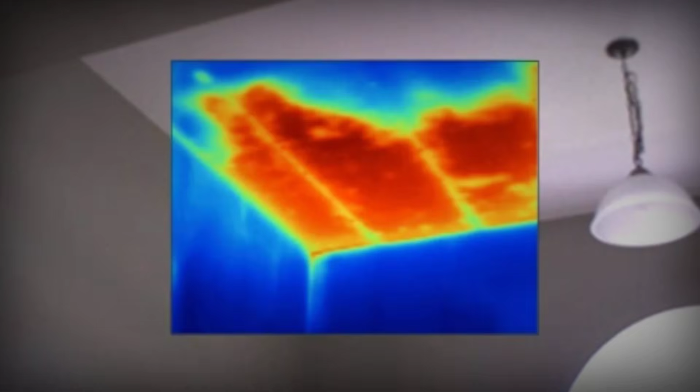There is a house in Denmark that hasn't used a furnace in 30 years. Not because it's connected to a special grid, not because it runs on solar panels covering every inch of the roof, not because its owners have found some modern technological workaround, because the house itself stores heat in its walls, in its floor, in the ground beneath it. Heat collected in summer, held through autumn, released slowly, quietly, through the depths of winter.

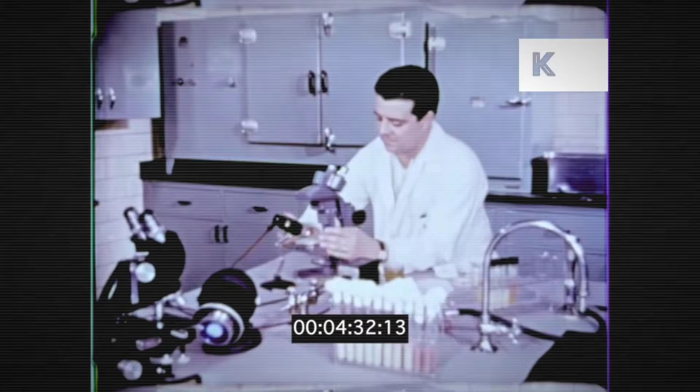No boiler, no gas line, no service contract, no monthly bill arriving in January when the temperature outside drops below zero, and every other house on the street is burning through fuel it cannot afford. Just a building that remembered warmth and gave it back when it was needed. This is not a new idea. It is not an experimental concept being tested in a university laboratory somewhere.

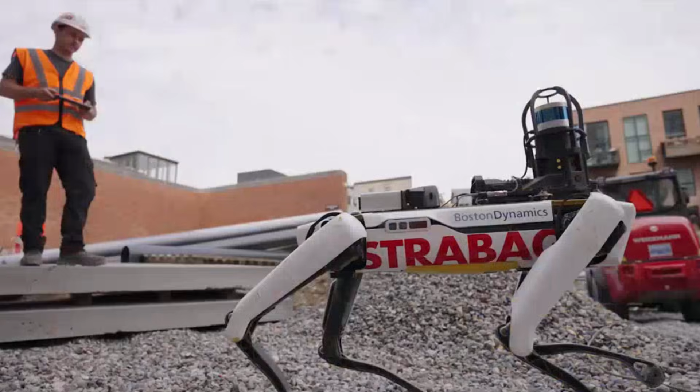It is a principle that builders understood centuries ago, that physicists measured and confirmed in the 20th century, that entire northern communities built their survival around for generations. And it is a principle that the modern construction industry, the energy industry, and the building code system in most of the Western world has made almost impossible to build legally today.

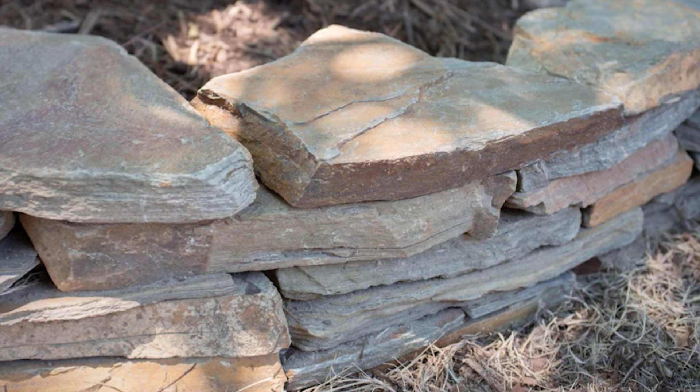Not because it doesn't work, because it works without generating revenue. You cannot sell a monthly heating bill to a house that stores its own heat. You cannot service a system with no moving parts. You cannot build a maintenance contract around stone and earth and water, and that is the only reason this technology feels unfamiliar. This is that story.

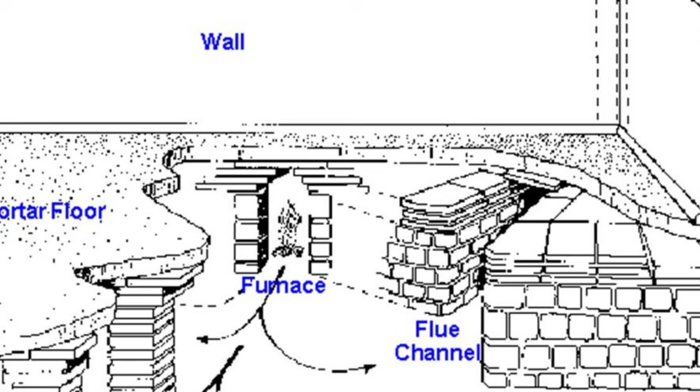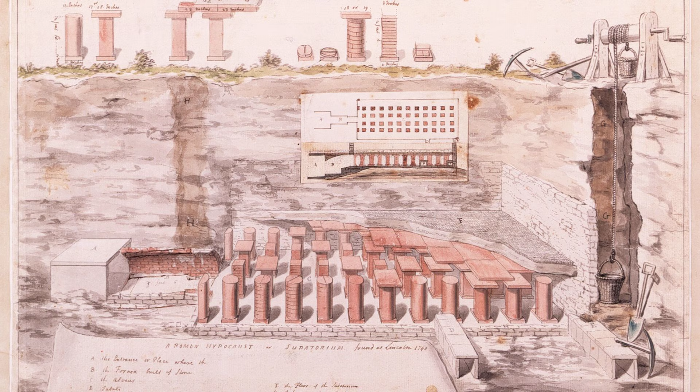Go back 2,000 years. The Roman hypocaust system is usually described in history books as underfloor heating, a clever, ancient luxury, something emperors used to keep their bathhouses warm. That description is technically accurate. It is also profoundly incomplete. The hypocaust was not just a heating method, it was a thermal storage system.

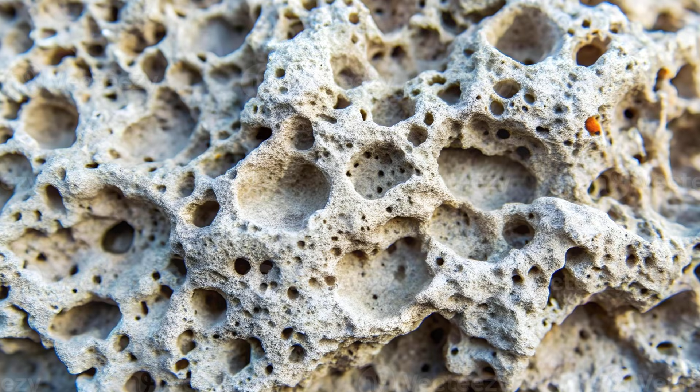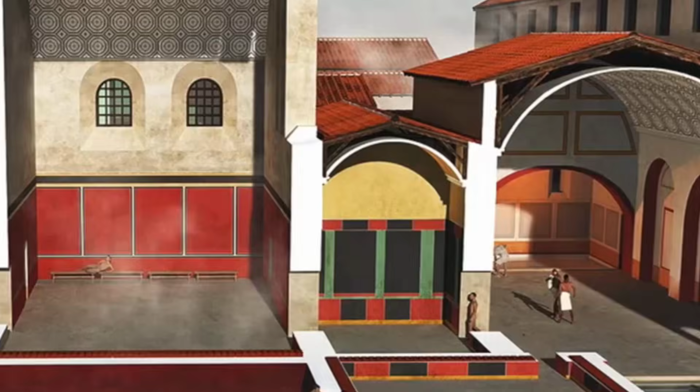Hot air generated by a furnace moved through channels beneath a raised stone floor. That floor, sometimes 6 inches of solid tile and concrete, absorbed the heat. It held it and released it slowly upward into the living space long after the fire itself had died down. The Romans weren't just heating a room, they were charging a battery made of stone, capable of holding thermal energy for hours, sometimes for an entire day.

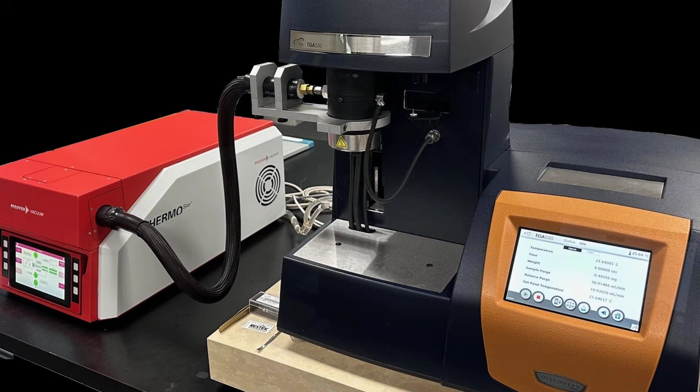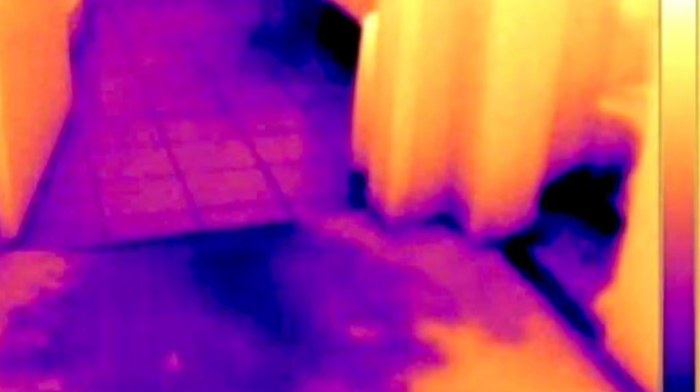The principle they were exploiting is called thermal mass, and it is one of the most powerful passive building technologies ever discovered. Every material has a capacity to store heat. Some materials store very little. Air, for instance, holds almost no heat at all. Warm a room full of air, and the moment that heat source stops, the air cools within minutes. Stone is different, concrete is different, water is different. These materials absorb heat slowly and release it slowly.

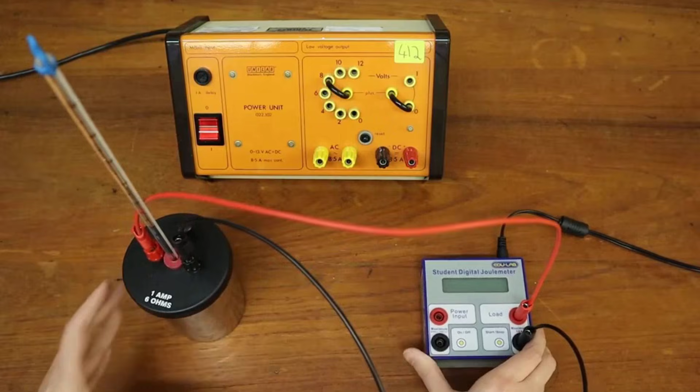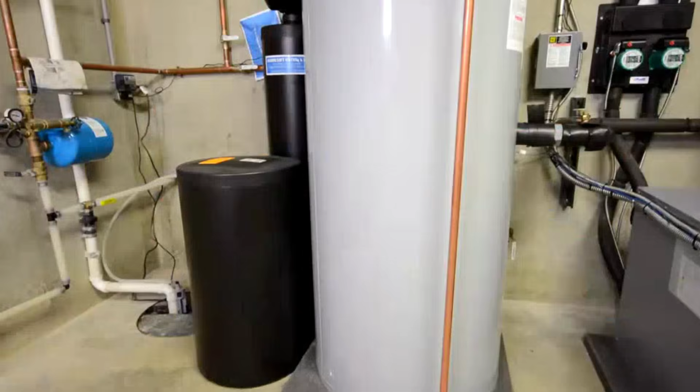The technical term is specific heat capacity. It is the measurement of how much energy a material can hold per unit of mass. Water has one of the highest specific heat capacities of any common substance. It takes enormous energy to raise the temperature of water by a single degree, and once raised, it releases that energy over an extended period. This is not a subtle effect. A single cubic meter of water can store enough thermal energy to heat a small room for an entire day.

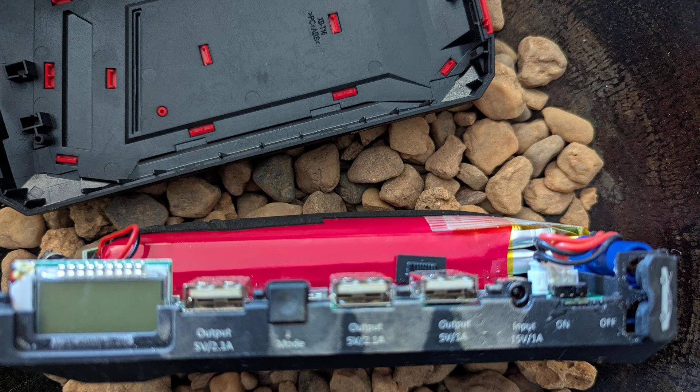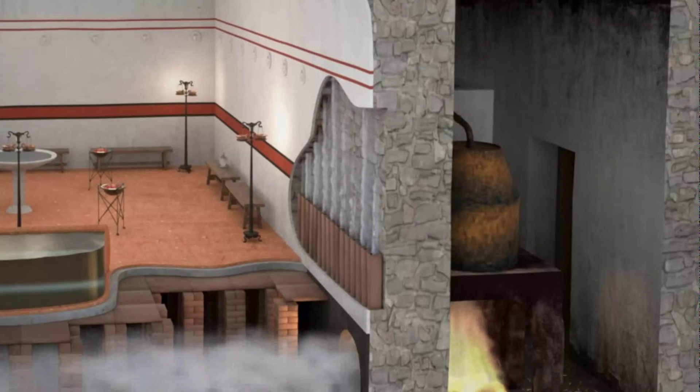A house designed around this principle, with water, stone, or earth as its thermal core, doesn't just stay warm. It becomes a heat reservoir, charging during periods of warmth and discharging slowly during periods of cold. A battery that runs on temperature difference instead of chemical reaction, and it requires no electricity to operate, no moving parts to service, no fuel to purchase. The Romans understood this intuitively. They built it into their floors, their walls, their public buildings.

But the Romans were not the first. Go further back. Neolithic builders constructing passage tombs in Ireland oriented their structures to capture solar gain at specific times of year. The famous passage at Newgrange aligns precisely with the winter solstice sunrise, flooding the interior with light and heat on the shortest day of the year.

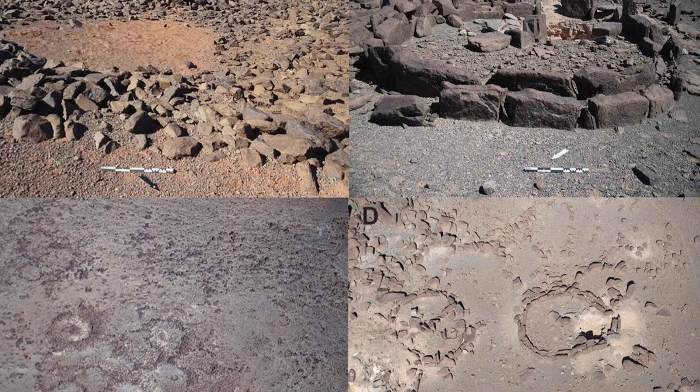Archaeologists once interpreted this as purely ceremonial. More recent thermal analysis suggests something more practical. The thick stone passage absorbed solar energy during the brief winter sunlight hours. The interior stayed measurably warmer than the external temperature, not because of fire, because of mass and orientation. 5,000 years ago, before written language, before bronze, before the wheel was in common use, builders understood that stone holds heat, and they built accordingly.

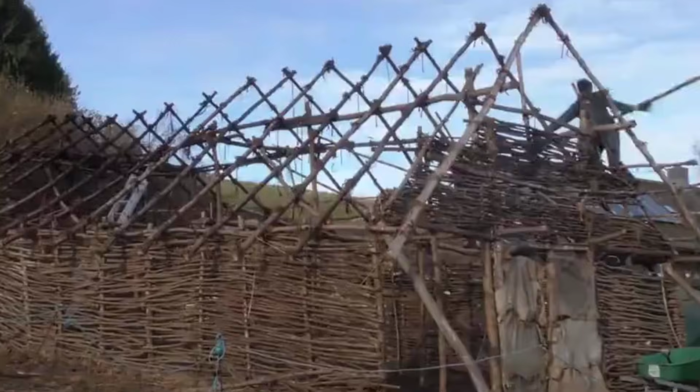Move forward to medieval Scandinavia. Viking longhouses were not primitive shelters. They were sophisticated thermal systems. Thick turf walls, sometimes 3 feet of compressed earth and grass. Earth is an extraordinary insulator. It changes temperature slowly, extremely slowly. The ground at a depth of just 6 feet maintains a nearly constant temperature year-round.

In most northern climates, that temperature sits between 8 and 12 degrees Celsius, cool in summer, warm relative to outside air in winter. Viking builders placed their structures partially into hillsides. The earth surrounding the lower walls acted as a thermal buffer. It did not just insulate, it actively moderated the interior temperature, pulling excess heat out in summer, releasing stored ground warmth in winter.

The longhouse didn't fight the climate, it connected to it, and through that connection, it stayed habitable in conditions that would have been lethal in a modern, thin-walled structure without active heating.

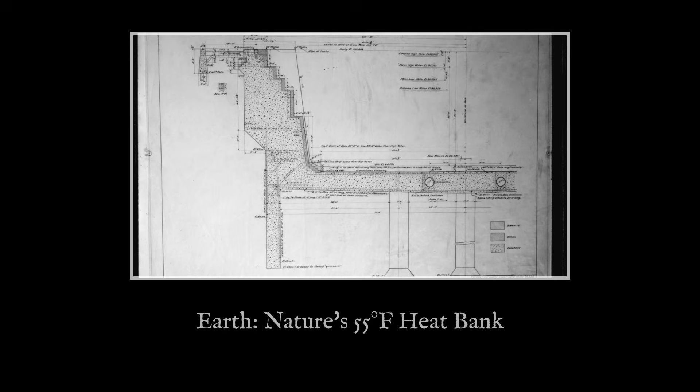Now move to the 20th century. The physics did not change, but someone finally started measuring it precisely. In the 1940s and the 1950s, researchers began documenting what they called earth-coupled heat exchange. The principle was that the stable temperature of the ground could be used as an earth reservoir, either absorbing excess heat from a building in summer or providing warmth to a building in winter.

The implications were significant. A building properly connected to the thermal mass of the earth beneath it does not need to generate heat from scratch every winter morning. It draws on a reservoir that has been accumulating energy all year.

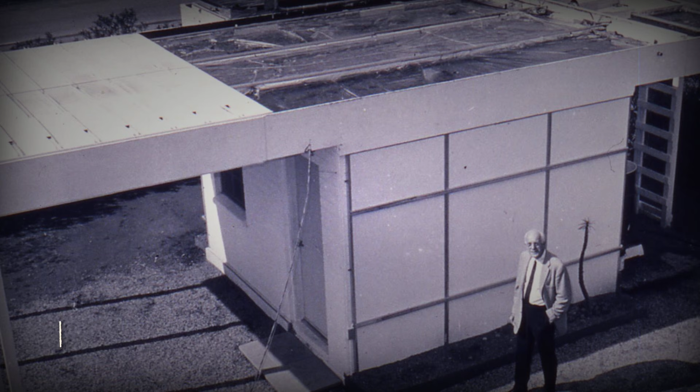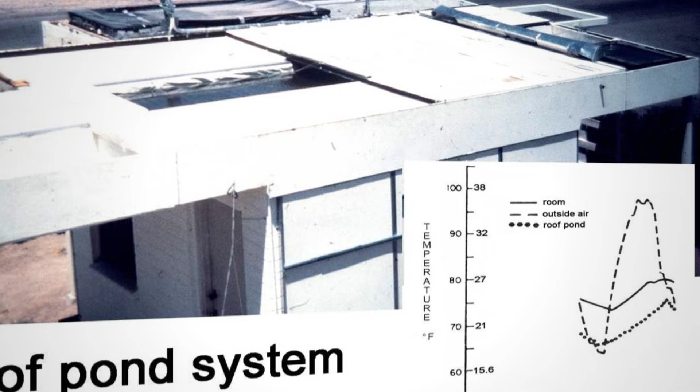In 1977, Harold Hay, an American engineer who had spent decades studying passive thermal systems, completed what became known as the Skytherm house in Atascadero, California. The design was radical in its simplicity. The roof held large bags of water.

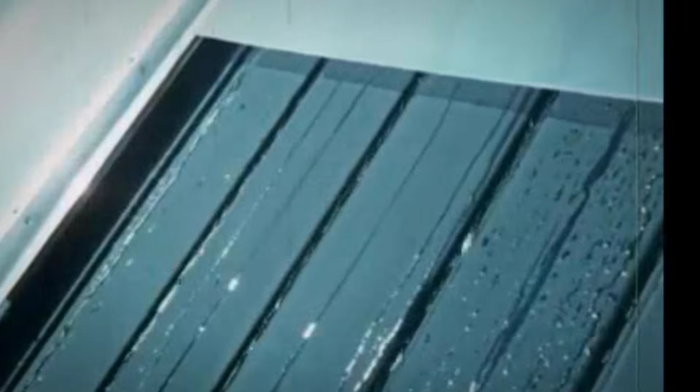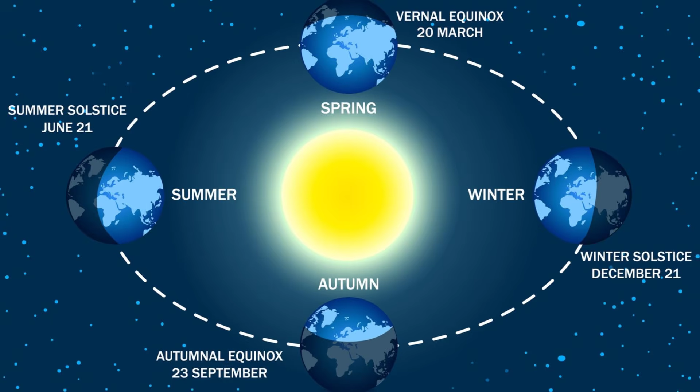In winter, the bags were exposed to sunlight during the day, absorbing solar energy and warming to temperatures well above room temperature. At night, insulating panels covered the bags, and the stored heat radiated downward through the ceiling into the living space below. In summer, the process reversed.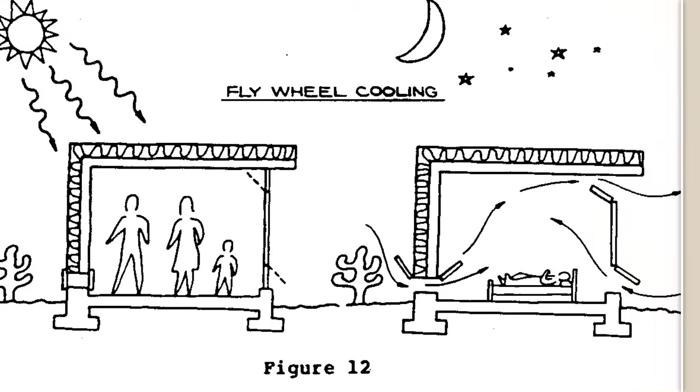During the day, the bags were covered to block solar gain. At night, the panels opened, and the water radiated its heat to the cool night sky, cooling below room temperature. During the day, that cool mass absorbed heat from the interior. No compressor, no refrigerant, no furnace.

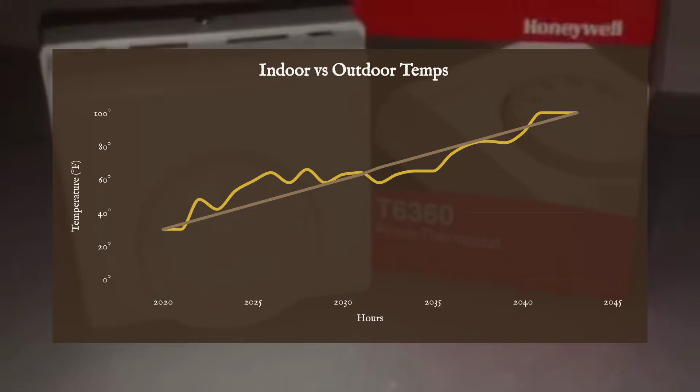Monitoring showed the interior temperature remained between 65 and 75 degrees Fahrenheit throughout the year, in a California climate that saw summer highs above 100 degrees and winter nights near freezing.

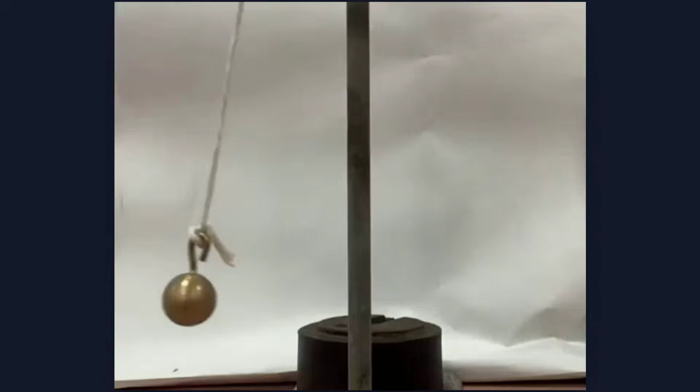One researcher who visited the house described standing inside on a January morning with the exterior temperature near freezing, the interior warm and steady, and no heating system operating at all. Just water on a roof. Physics doing the rest.

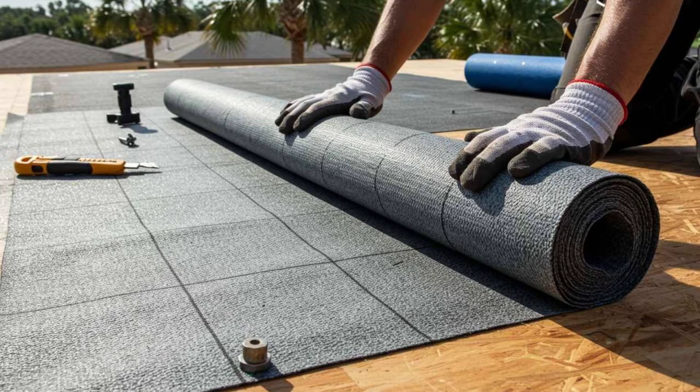The results were published. The technique was documented. A handful of builders in California and New Mexico began experimenting with variations. And then, almost nothing happened. Not because the system failed, because the system had no industry behind it. No manufacturer producing roof pond components. No installer network to deploy them.

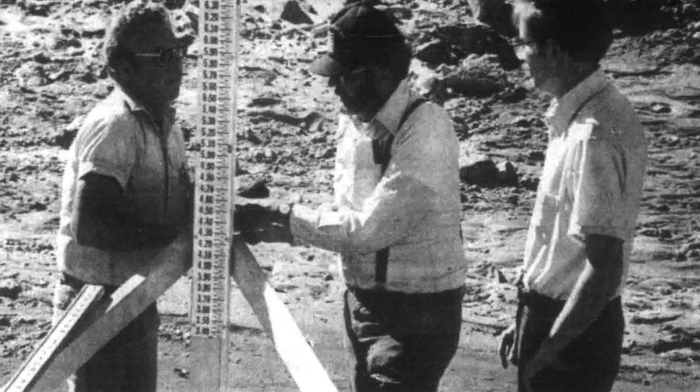No trade association lobbying for code recognition. No certification pathway that allowed appraisers to assign value to a water-filled roof in a standard mortgage assessment. The insurance industry looked at bags of water on a roof and saw liability.

The appraisal system looked at a house with no furnace and saw an anomaly it had no framework to value. The building code system looked at an integrated water-filled roof and saw a category it did not recognize.

Harold Hay spent the rest of his career trying to get this technique into mainstream construction. He never succeeded, not because anyone proved it did not work, but because the pathway from proven physics to permitted construction runs directly through institutions that were built around a different model.

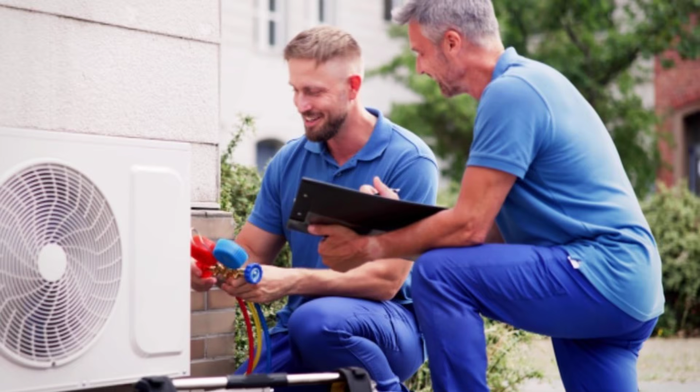A model where heat is something you purchase, where comfort is something you subscribe to, where the system that keeps you warm in January generates a bill, and that bill generates revenue, and that revenue funds the lobbying that writes the codes that determine what can be built. A house that stores its own heat from summer and releases it in winter generates none of that. It is, from the perspective of the energy economy, a threat, not to physics, but to profit.

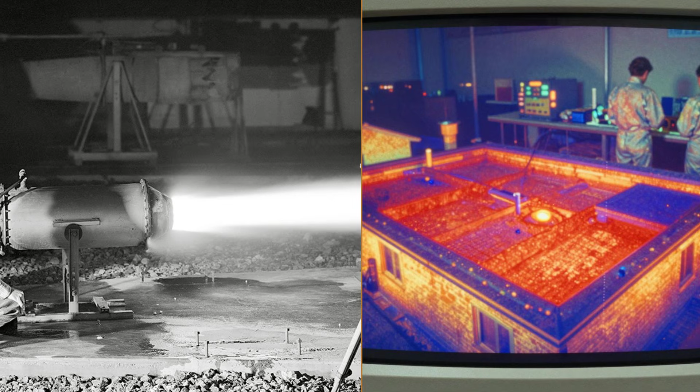Now understand what that actually means for the house you live in today. Your heating system operates on a simple and brutally inefficient principle. It takes cold air, burns fuel to heat it, and pushes it into your rooms. The rooms lose that heat to the outside within hours. The system fires again, burns more fuel, pushes more heat, and the house loses it again.

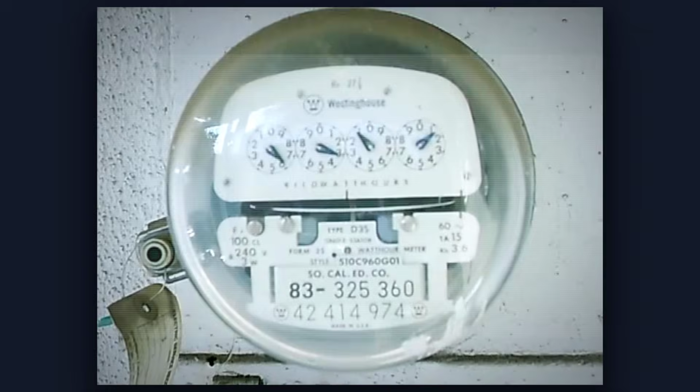It is a continuous fight against heat loss. You are not heating a building. You are constantly replacing heat that a poorly designed building cannot hold. The thermal battery house does something fundamentally different. It accumulates heat over time, days, weeks, sometimes an entire season.

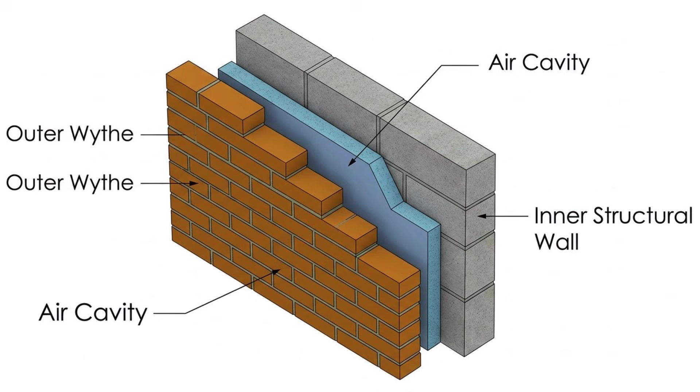In mass walls, in water storage, in the earth beneath the foundation, and it releases that heat gradually at the rate the building needs it. Not in a blast that the walls immediately shed to the outside, but in a slow, steady drift that the mass controls. The difference in energy consumption between these two approaches is not marginal.

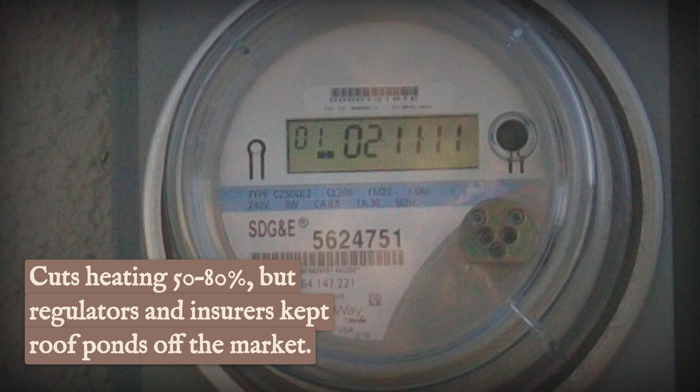Studies of earth-sheltered and high thermal mass homes consistently document heating energy reductions of 50 to 80% compared to conventional construction of equivalent size. Not 10%, not 15%, 50 to 80%. From a technology with no moving parts, no fuel requirement, no service schedule, and no monthly bill.

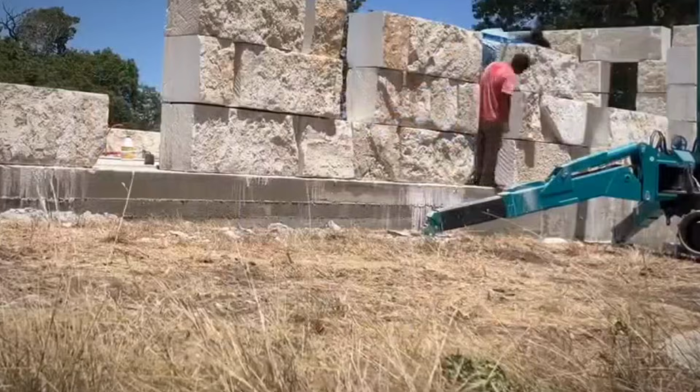In Part 2, we go further. We look at the specific buildings that proved this worked, and what happened to the builders who tried to bring it into the mainstream. We look at where thermal battery construction is still happening today, and why it is happening almost entirely outside the United States. And we look at the question that sits underneath all of this.

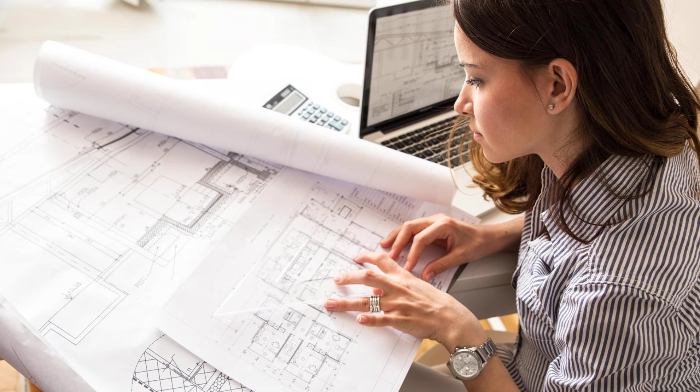If a house can store heat for days, why does your heating bill arrive every single month? The house in Taylor, South Carolina, cost $5,500 to build. No contractor, no permit complications, no elaborate mechanical system requiring annual servicing. Just a south-facing structure with 2,455 gallons of water stored in dark, painted barrels lined along the north wall.

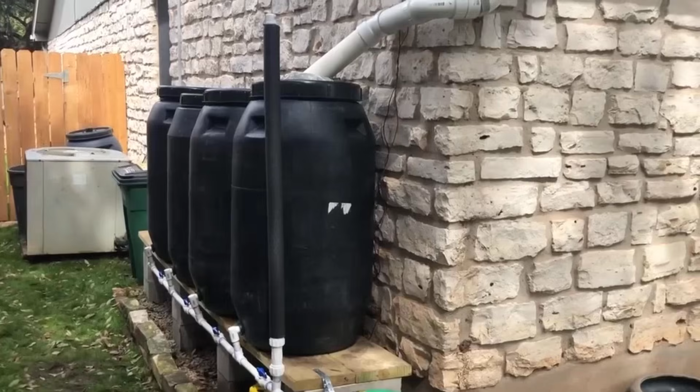Those barrels absorb solar heat through the day. By late afternoon in winter, they are warm to the touch. By morning, they have released that warmth slowly into the space around them. No furnace fired, no propane truck arrived, no bill accumulated. A comparable heated structure would cost approximately $1,000 in fuel every single winter.

The barrels didn't consult a building code before storing heat. The sun didn't wait for regulatory approval before warming the water. It just worked. Exactly the way it worked beneath a Roman hypocaust floor. Exactly the way it worked inside a Viking longhouse buried into a hillside. Exactly the way Harold Hay measured it on a water-filled roof in Atascadero, California in 1977. Physics has never changed. Only the permission has. Now look at what the rest of the world did with that same physics.

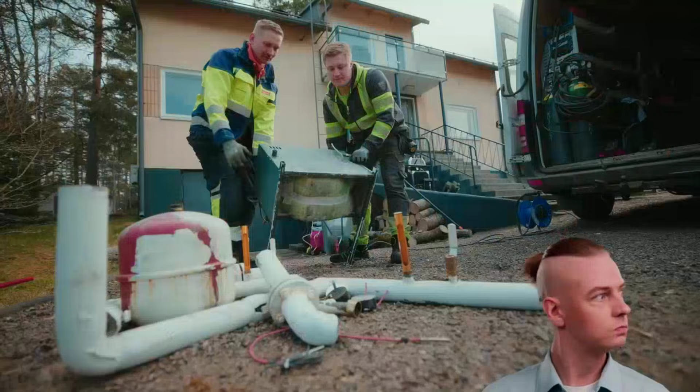In Sweden, seasonal thermal energy storage is not alternative architecture, it is municipal infrastructure. Underground rock caverns, insulated and filled with water, store solar energy collected during summer months. When winter arrives, that stored heat is retrieved and distributed through district heating networks serving thousands of homes. The geology does the work. The physics does the work. The city just built around it.

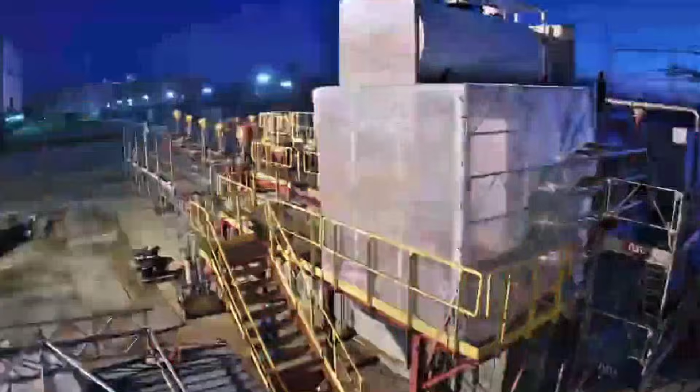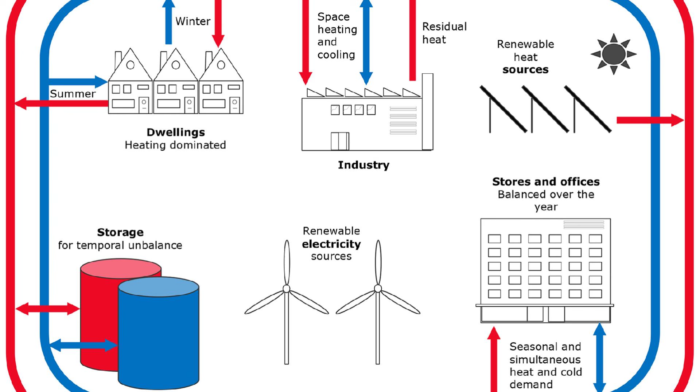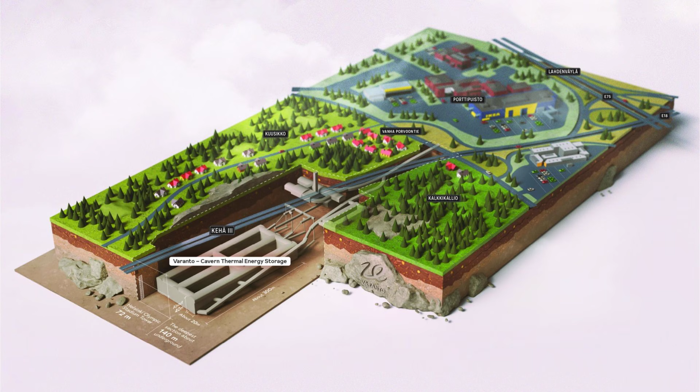In Finland, similar systems operate at municipal scale. In Denmark, pit thermal energy storage projects have been expanding since the early 2010s. The EU has funded research into large-scale seasonal storage across multiple member nations because the energy math is undeniable. Heat stored in summer costs almost nothing to collect. Heat generated from fuel in winter costs everything. The gap between those two numbers is where an entire continent decided to build.

In China, attached thermal mass sun spaces are described in recent published research as a popular, simple, low-cost, and widely used retrofit measure in cold northern climates. Not experimental, not niche, standard practice.

Government supported, widely replicated. In Germany, passive house construction, buildings so thermally massive and so carefully sealed that body heat and appliance heat alone maintain comfortable interior temperatures through a northern European winter, has produced over 60,000 certified structures. That number represents decades of construction, thousands of builders trained in the method, a certification infrastructure that rewards thermal performance, and a mortgage system that has learned to recognize and value what it cannot always see on a standard appraisal form. America has a few hundred passive house structures.

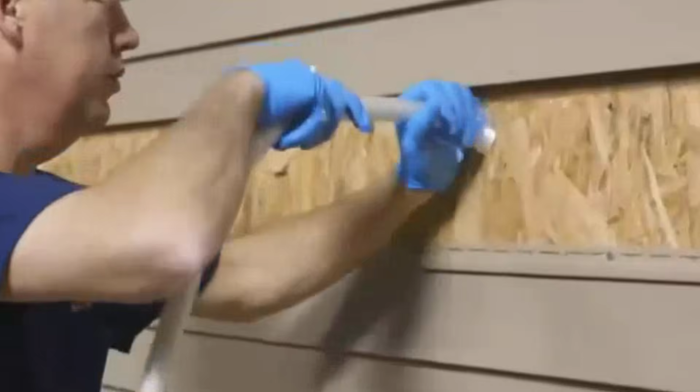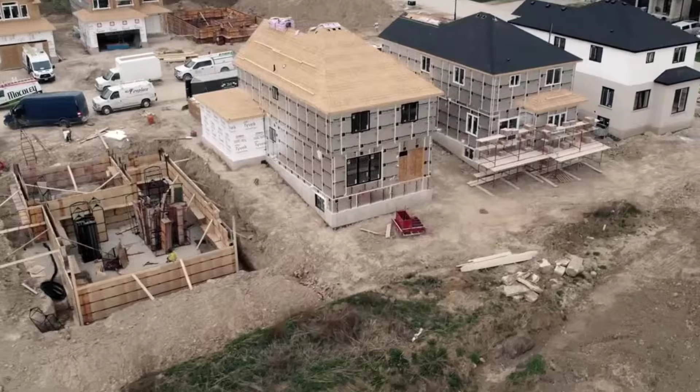Not because American winters are less cold, not because American physics operates differently, not because American builders lack the skill, but because the system surrounding construction in America was built to reward a different outcome. And that system does not easily change direction. Consider what every thermal battery house represents to the industries surrounding conventional construction.

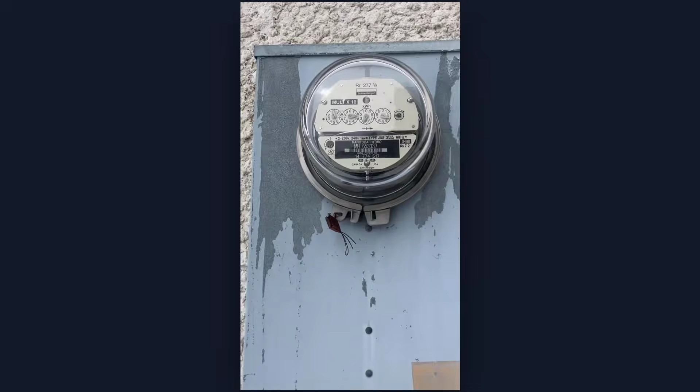Every high thermal mass wall installed is a gas furnace never sold. Every earth-sheltered home completed is a fuel delivery route that ends permanently. Every seasonal storage system operational is a utility meter that stops accumulating charges through the coldest months of the year. The thermal battery house does not just reduce a heating bill, it threatens the business model that the heating bill funds. And that business model has representatives in every room where building codes are written.

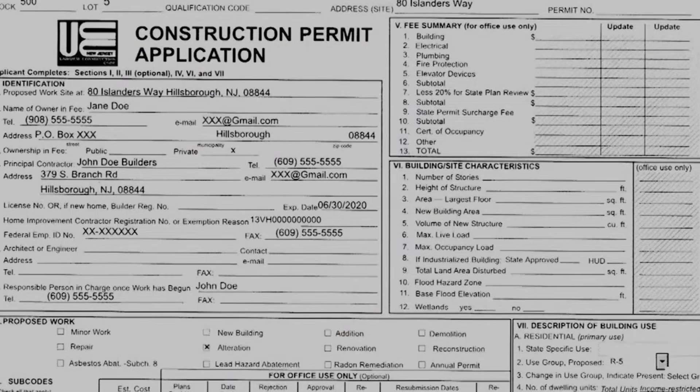The industry did not ban thermal battery construction outright. It made the pathway narrow enough that most people never find it. Code complications, appraisal uncertainty, insurance hesitation, lender unfamiliarity. The burden of proof placed entirely on anyone proposing an alternate method, while the conventional furnace-dependent house walks a paved road with no questions asked. Each obstacle alone is manageable. Together, they form something more powerful than a ban.

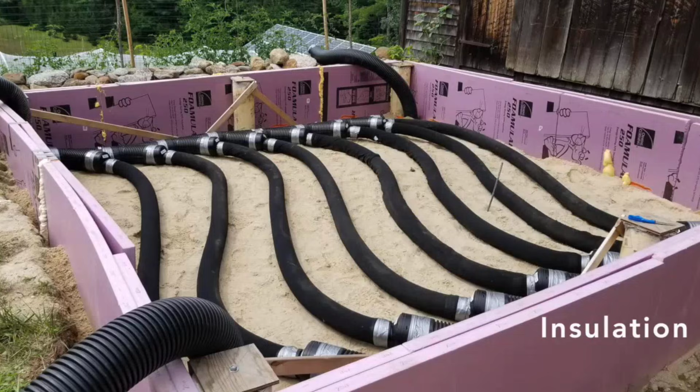They form invisibility. Most people never learn this technology exists. Those who do find it nearly impossible to finance. Those who finance it struggle to permit it. Those who permit it watch it appraise poorly against comparable sales that do not include it. The knowledge did not fail. The infrastructure around it was never built, but the physics is still there. On the other side of every obstacle, unchanged, undefeated, waiting.

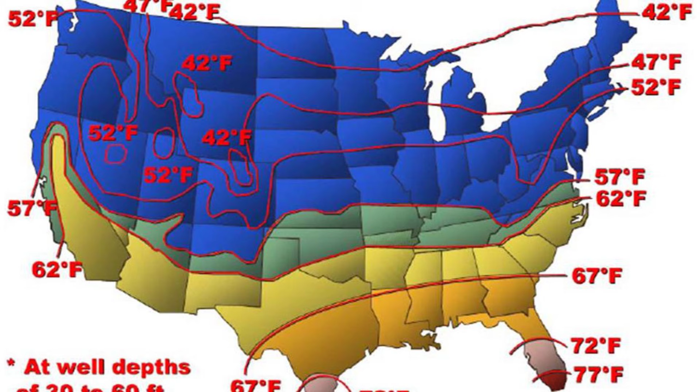The stone still holds heat the same way it held heat beneath a Roman floor 2,000 years ago. The water still stores energy the same way it stored energy in Harold Hay's roof in 1977. The Earth beneath every foundation still sits at a stable temperature that neither winter nor summer can significantly disturb. These are not design preferences. They are physical constants. And physical constants do not expire because a building code fails to recognize them.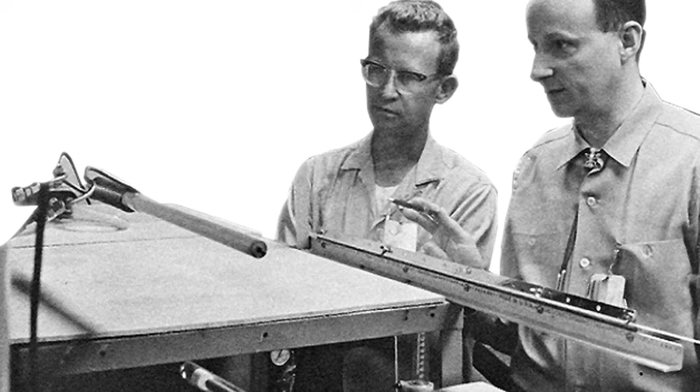The Roman architects knew it. The Viking builders knew it. Researchers at Los Alamos measured it. Builders in Germany certified it 60,000 times. The house that heats itself is not waiting for invention. It is waiting for permission. And permission, unlike physics, can change.

The sun still rises every morning. The stone still remembers every afternoon. The earth beneath your feet is warmer right now than the air above it. The heat is already there. It always was.